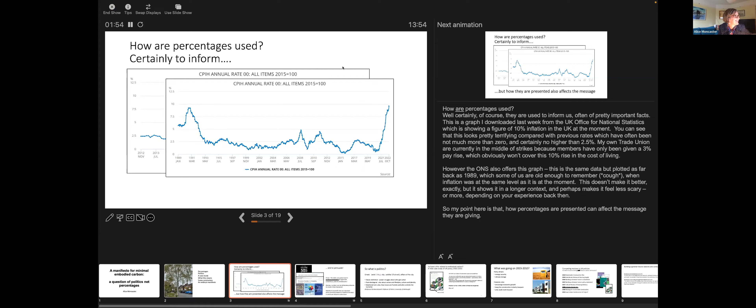Right, let me try, perhaps okay. I need to do a new share. So can you see exactly the same now? If you go to full screen now. We still see your notes. And I'm not sure how we could... I think, Alice, sorry for interrupting, if you have 2 screens, I think you need to share the other screen with us. Okay, so if I stop share, if I share desktop 1, can you now just see my slides?

Yes, that works great, thank you for the suggestion. Thank you, that's yes, I do apologize. We're not allowed to use Zoom at the Open University in the UK for some reason, so I'm a bit of a novice on using it.

Okay, so percentages, so we had got to this second chart from the UK Office for National Statistics, which shows inflation going back to 1989. I'm putting this up to say, obviously it's the same data, but it gives you a different impression. If you were around in 1989, 1990, it might make you feel quite scared because you might remember negative things that happened back then, or it might make you feel more confident because you'll think, well, we've been through this before and we can come out of it again. So percentages, how they are presented affects the message.

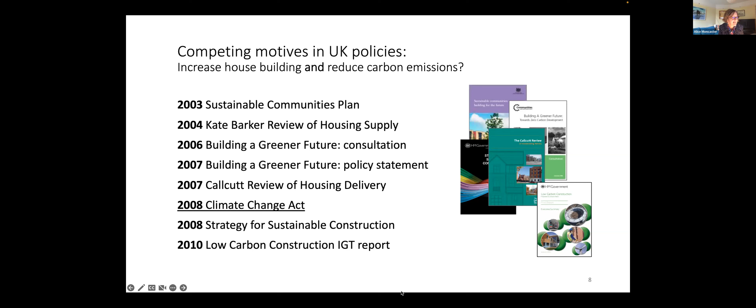After that, we started to see evidence of this political contest going on. So there was a consultation at the end of 2006 on building a greener future towards zero carbon development. So this was a policy also about building homes, but it was about building zero carbon homes.

And what the consultation was asking was, what is the definition of zero carbon? So it put forward its definition of zero carbon and asked for comments. And the industry comments were numerous, and a lot of them said it should include embodied energy. So these were people from industry, these were designers and contractors saying it should include embodied energy, embodied carbon.

And the report on this consultation brought these out in both the conclusion section and the section which showed the recurring and significant themes throughout the consultation. So this was being talked about and pushed really by industry back then.

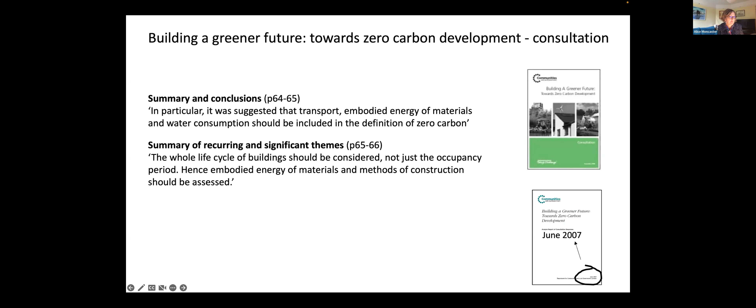However, a month after that consultation was published, the actual policy statement came out and completely dismissed it. It said, we don't believe a full consideration of embodied carbon is practical or realistic in the short to medium term. They changed it, putting it in a section about white goods, about services goods. And they said there isn't enough evidence and we don't know how to do it.

So the fact is, they dismissed it, but they did know the impact of construction materials. We'd had the BRE Green Guide specification giving us an idea of what they were for the last 10 years at this point, and the Bath Inventory of Carbon and Energy, which many people around the world have used since, was first published in 2006.

In fact, even the UK government had produced a previous report from a different government department saying that carbon emissions from the production and transport of construction materials were really important. They came up with these figures: 44% of all construction-related emissions and 72% of a building's life cycle carbon is embedded into the physical asset. So embodied impacts were seen as really significant by some parts of the government, and we see the use of percentages in particular being used to persuade of a political argument.

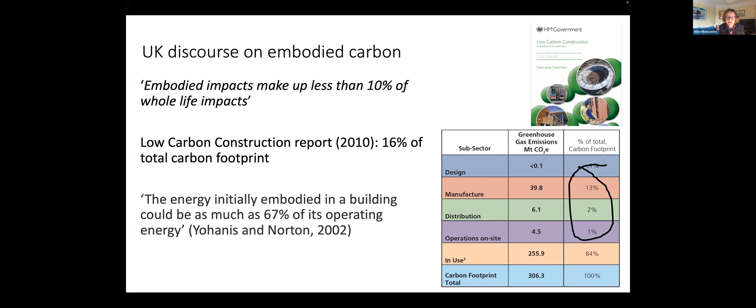And a paper from 2002, which looked at UK construction, Yohanis and Norton, said the energy initially embodied in a building could be as much as 67% of its operational energy, although they only used a 25-year lifetime, which I thought was really interesting. So that shows too how figures on both sides of that percentage equation can be chosen to demonstrate what you want to demonstrate. I think they wanted to demonstrate that embodied carbon was important and a big figure.

The definition of zero carbon had been set by the DCLG, the government department who'd won control over the narrative and decided how zero carbon would be framed. This was their final report.

The Callcutt review came out in November 2007. John Callcutt was a house builder, basically. He said, our review shows clearly that the house building industry does have the potential to deliver, it's now gone up to 240,000 new homes a year by 2016, and to achieve the zero carbon target. So if you make zero carbon only include operational carbon, then it's quite possible to build and to achieve zero carbon.

And the strategy for sustainable construction in 2008 only mentioned embodied carbon once, and it said it's generally far less than energy consumed during the lifetime of the building or the infrastructure project. It also said, nevertheless, is already addressed - basically, someone else is doing something about it. So arguments were being made that embodied carbon is minimal, that it's already been addressed elsewhere, and it's too complicated to calculate anyway. So this is real dismissal.

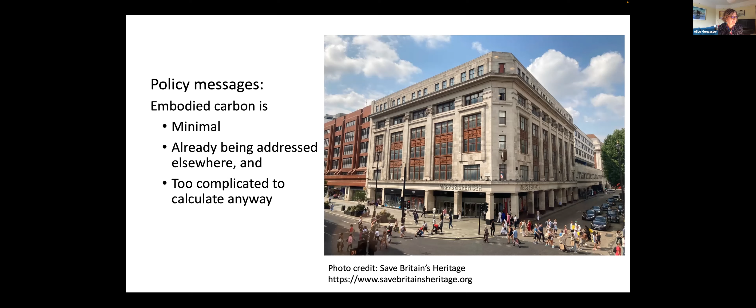And this fed into our report for the International Energy Agency, EBC Annex 72. And also more recently, we've looked at this in a new paper, Embodied Carbon of Concrete in Buildings, in Buildings and Cities.

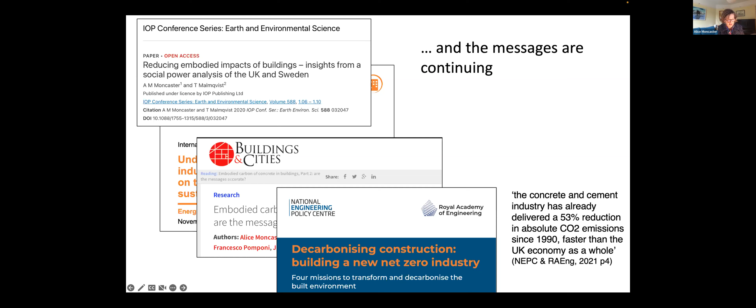So embodied impacts were excluded from the metric of zero carbon, even though it had been discussed and calculated within both academia and industry for many years. In particular, the evidence of dissenting voices, those reports from DEFRA and the industry consultation on building a greener future, are indications that this was a political struggle. This was a definite political move to keep it out.

And as Theodore Porter also noticed, professional industry experts were being used throughout to evoke public trust. And throughout, there were those industry experts leading the government reports.

So I wanted to look briefly at political theory, which says that industry networks and lobbies act along this continuum. At one end, there are the special interest groups who are self-organised individuals from that industry. They fight for their own collective concerns, and they have high autonomy, but relatively low political power. At the other end are what are known as policy networks, whose membership, topics, and even the very setting up, is defined by government. They have low autonomy because really the government is controlling what they're talking about and even what they're deciding.

But their prestige gives them power within industry. So they've almost swapped, in this case, their right to autonomy for being part of this more elite policy community. At this extreme, power is retained by government acting through the perceived expert influence of the industry groups. And of course, they also choose industry members who really actually agree with what they're looking at, so they choose house builders to demonstrate that they need to build more houses, for example.

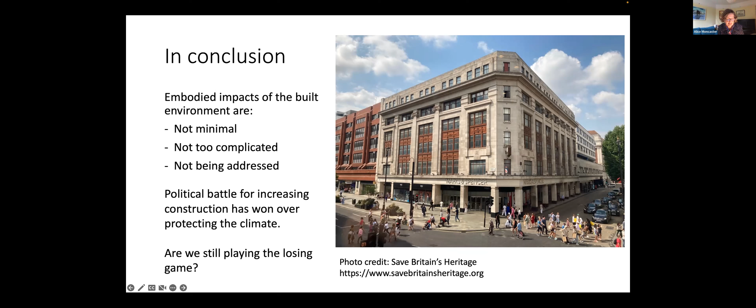So my embryo manifesto is: first, we should accept responsibility for the size of embodied impacts, and we should accept that these are happening now, not in the future, and they need to be decreased radically now, not in the future. We need to ask first, do we need to build anything at all, or is there an alternative? And next, do we need to build like we are doing, or is there an alternative? And finally, to always remember to question the numbers and percentages that we are being given and ask cui bono, which is who gains. Thank you very much.

I think I had a thank you for listening.

And I'm going to make you co-host, so I hope you can hear me now. We can hear you well. Cool, great, now let me try to share my screen. Whoops. Share, maybe like this could work. Yes, it works very well. And I'm going to pin you as well. Just remove that, okay. Okay then, thank you very much for the invitation, thank you Raman and Alice for organizing such a great event.

And I will present our work on how we see a climate neutral and circular built environment. It's mainly, I would say, a Swiss or European perspective on climate neutral and circular buildings.

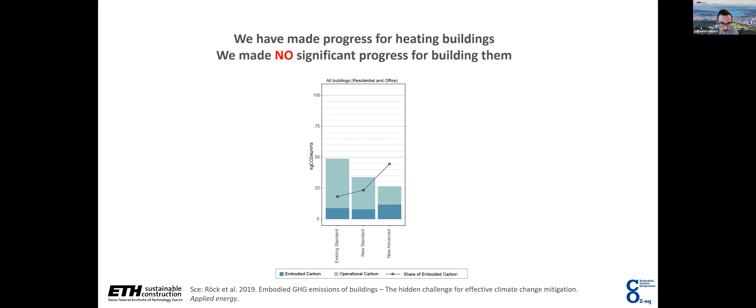I think everyone here knows why we need to focus on embodied carbon. We've made quite a bit of progress on how we operate buildings, but if you look at the average embodied emissions, it's always more or less stayed the same. We know we have to reduce emissions drastically, so there's not much time to lose.

And maybe just to come back to some of this, I think it's in line with what Alice was saying: we knew this already, but we've lost a lot of time muddying the waters, or something like that.

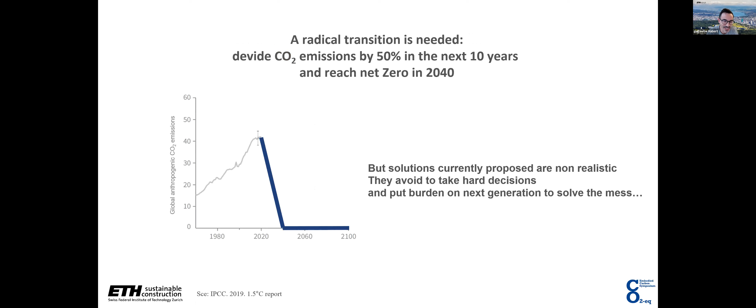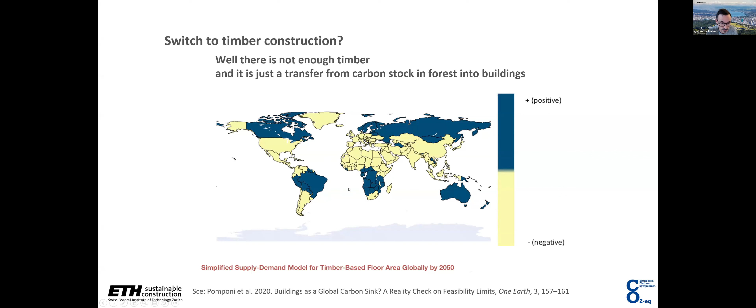The other way of doing it is to say, well, we can keep business as usual, we do concrete, except we do carbon capture and storage, so we continue to produce cement but without CO2 emissions.

That's magic. This is a study from the Carbon Capture and Storage Institute, from 2021, which I was surprised to see. It clearly shows that to get from 2020 to 2050, we just have to multiply the storage capacity by 140, which is quite surprising, because the same report shows that carbon storage capacity has actually been reduced by 30% in the last 10 years.

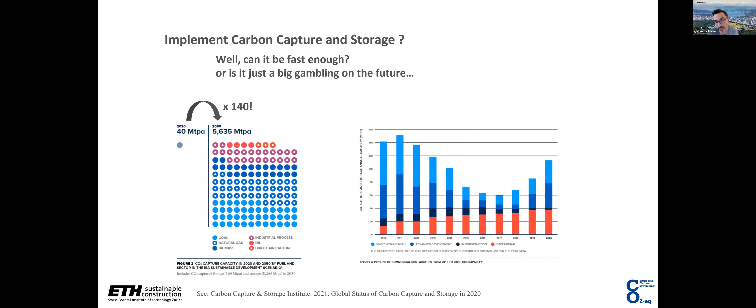So it means in the last 10 years you have reduced the capacity by 30%, and we think that we can increase it in the next 30 years by 14,000%. Well, I mean, the pace doesn't work, but the problem is, if it doesn't work, then we will end up at a moment where we have emitted too much CO2.

The way to do it is maybe first to simplify a little bit. You have three main flows. One is the human flows. That's the one, like 6 gigaton carbon per year, more or less, 6-9, something like this. And it's purely linear. That's why it's very small, but purely linear. That's why it creates climate change.

And then you have two huge circular flows, which are the biological carbon cycle, 120 gigaton carbon per year, and the geological carbon, so the equilibrium between the ocean and the atmosphere, which is 90 gigaton carbon per year.

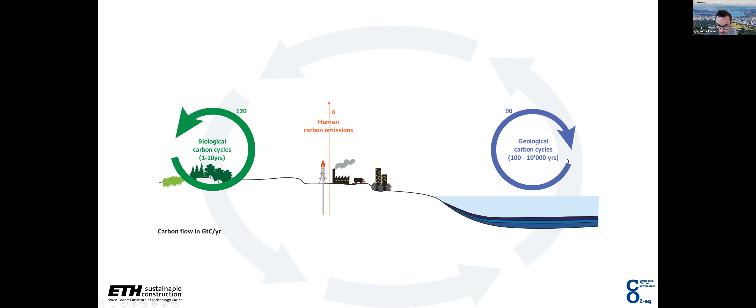They have a certain pace, these flows, because if you think spring, winter, you have a carbon molecule that is going in spring, stored in the leaves, and then falling, so being released in the atmosphere. And then on the other side, for the geological cycle, it takes much more time to go through the ocean, deep ocean, and then come back. So how do we play with that?

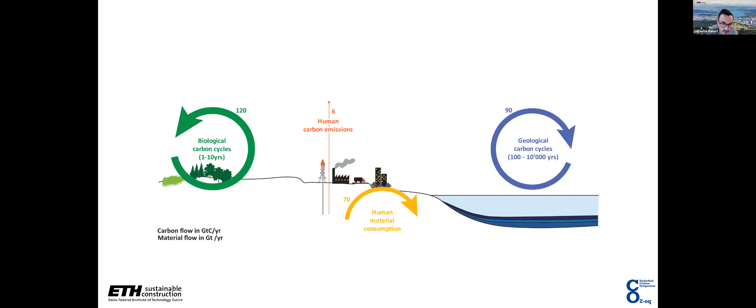The last linear flow that we have to think about is also the material. A linear flow of material of around 70 gigaton material per year that is extracted, and also landfills. And so first one is to say, okay, can we reduce these flows? This is, again, something that I think is extreme. I mean, that's more or less what I think what you said, Alice, is like, it's easy, it's known, and there are solutions.

This is a study we did, a review that we did 2 years ago, to show that if you look at the cement industry, and if you don't look just at the cement as an industry, as an industrial plant, but that you look at the cement as a complex value chain of various different actors, from the waste producers that can produce alternative fuel to the cement, to the concrete producers that can adapt the amount of sand, gravel, and cement in the concrete, to the architect or the engineer that can design the building, the demolition company that can either put everything in the dump site or actually sort the things or even deconstruct, and finally to the client that can act or not.

You have savings that are very easy to do, which means keeping the standards as existing, keeping the technology as existing, and you can save, if you see here, something like 60%, let's say 50%. So you have like 50% of CO2 emissions that can be saved just by doing well our job, meaning less clinker in the cement, less cement in concrete, less concrete in structure, less structure, and a certain reuse of the final waste. And that's it.

So you have already saved 50%, which is great with this mainly new type of cement, is that they will carbonate faster. So it means usually the cement, if you know a bit of the cement chemistry, you have limestone that you burn. So you have CO2, fossil CO2 that is released in the atmosphere, but within a certain geological time, the cement will go back to limestone, and so you will recarbonate your cement.

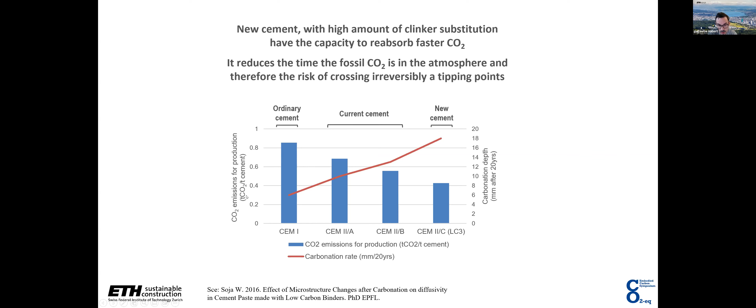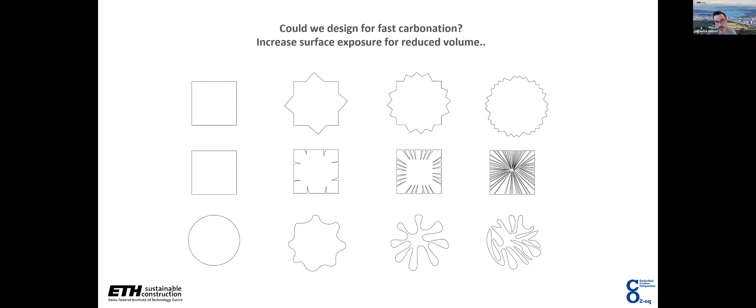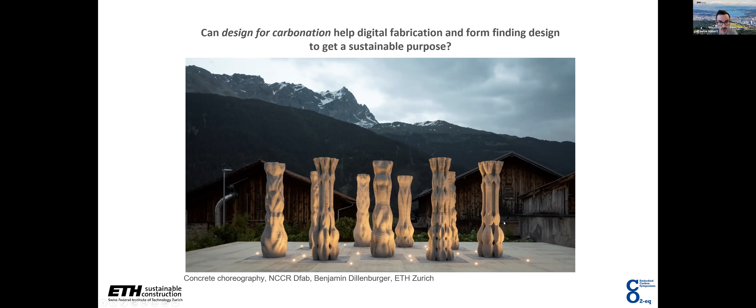Especially if you think about structures designed to carbonate as fast as possible—typically exposing as much surface as possible of the remaining volume. I think that could be an interest of 3D printing, where you expose as much concrete as possible to carbonate faster.

So on one side you're emitting less CO2 and recapturing it faster, and on the other side you can play with the biological cycle, like Luke was saying with hempcrete. Usually hemp or straw absorbs CO2 and releases it after 1 year, but you put it in the built environment and store it for 50 years. So you use the biological cycle as a pump to extract CO2, avoiding complex carbon capture and storage, and you can capture CO2 relatively fast, especially with fast-growing bio-based material.

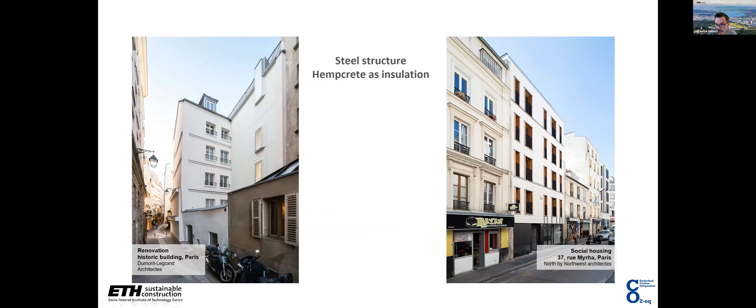For insulation, from a European perspective, straw and hemp are clear alternatives. Here are a few examples just to show it's not a crazy building—this is a very normal building in Paris, with hempcrete on the facade.

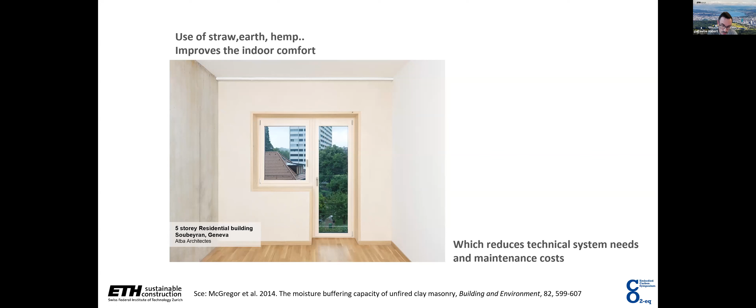To conclude on this logic, what I really think is that we should not think about one solution—like carbon capture and storage, or timber. Timber is part of the solution, but not the one solution that will save us all. It's really about putting the right material at the right place, and the right amount of material within a certain building. The way we could present it is to say we just need to change our material diet.

Same as it's obvious now for most of us that a vegetarian diet is better for your health and better for the environment—it doesn't mean you should not eat meat, but reducing the amount helps. Here it's a bit the same.

It's good to have glass and windows in your building, but this is a super carbon intensive material, so you need to use as little as possible. On the contrary, you optimize your low carbon materials like concrete, cross laminated timber, bamboo, etc. And you use as much as possible vegetable-based, carbon negative material like straw, hemp, solid wood, and others, plus carbon neutral materials like earth.

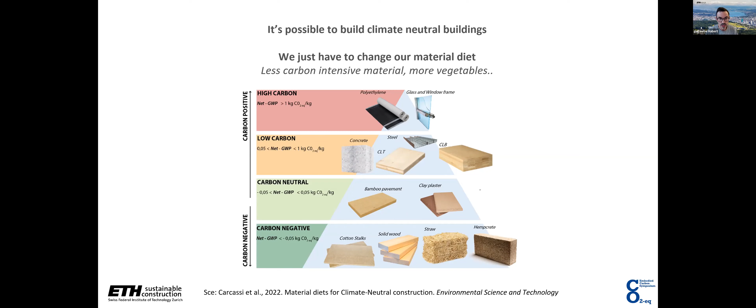Finally, before answering the question: do we have enough? This is a study we did recently, very basic, looking at how much bamboo and straw you have in the global south and north—straw in the global north for renovating the existing building stock, bamboo in the global south for new construction—and how much demand exists. We found that most of the time we have much more supply than demand, so we have enough materials.

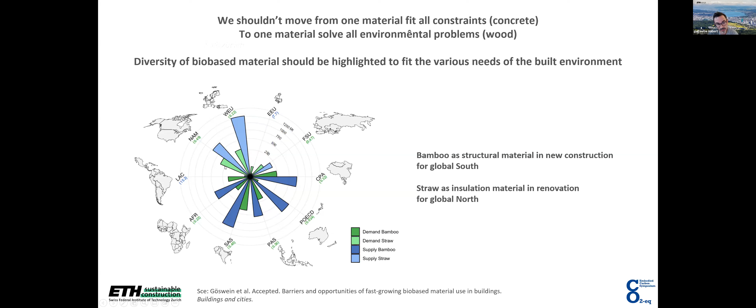To finalize, this was to say it is possible to be climate neutral. The last thing is, can you be circular?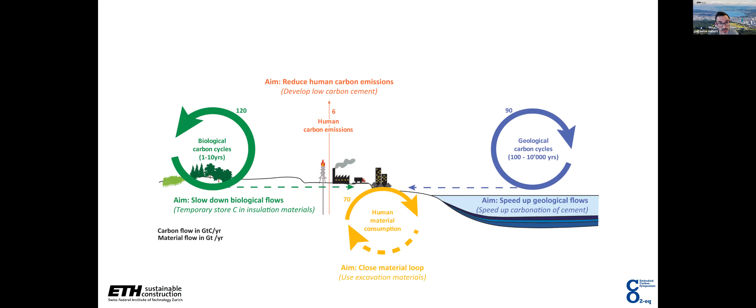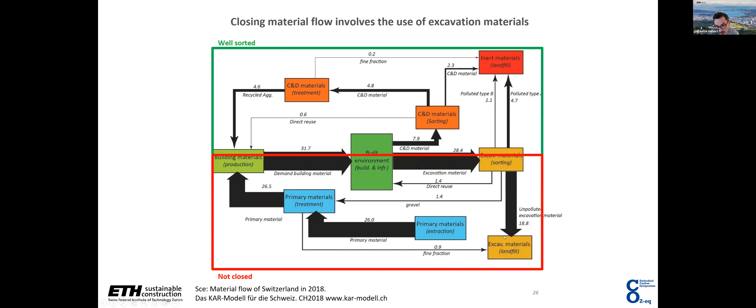The circularity question is complex, but to make it brief: if we just think circular in terms of amount of material, there's confusion, because the main material extracted from our cities isn't glass or windows, it's excavation materials. This is the material flow in Switzerland, where construction and demolition waste is mostly already circular with recycled concrete. What's absolutely not circularized is the excavation material that goes to landfill, and that material is actually earth. So if we want to circularize construction, we should think about how to use this excavation material.

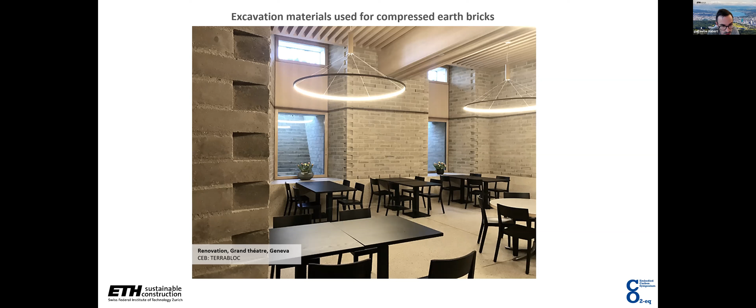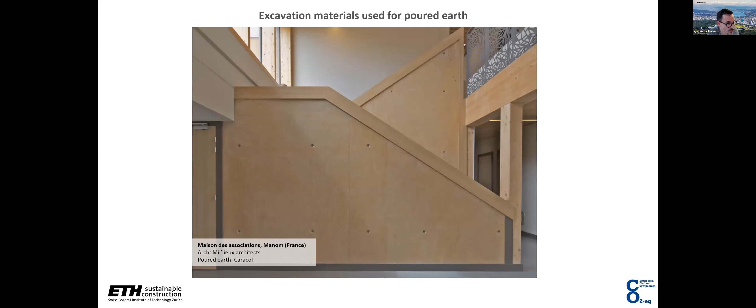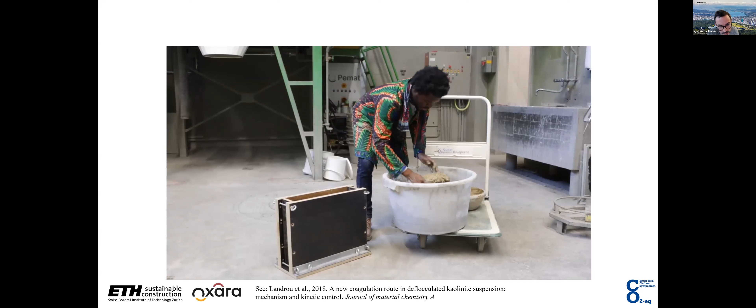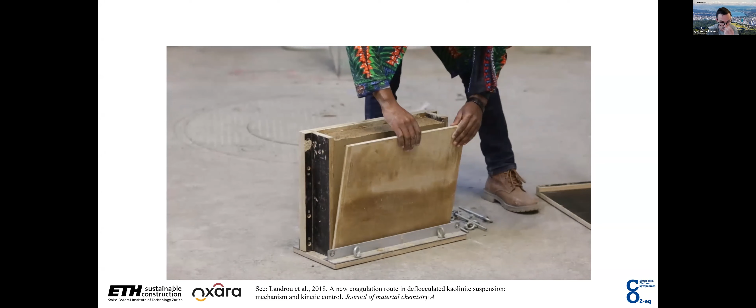If I have 2 minutes, let me show you the work we've done on this earth. Can we deflocculate the earth, the excavation material, so that we can make it like concrete - a poured material that we pour into a formwork, remove the formwork, and have a stiff material that works like normal concrete? This is now a startup called Oxara, promoting this cement-free concrete, because it looks like concrete but is just earth.

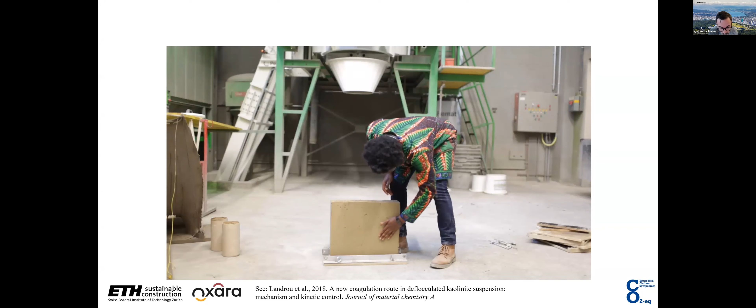So to conclude, I think it's typically possible to build these climate neutral and circular buildings with the technology and material we already have, without waiting for a magical solution like carbon capture and storage, which at best will arrive too late, and at worst won't arrive at all.

And the thing I didn't talk about, but I think Luc mentioned, is technical systems. It's a problem if we really want to go climate neutral - we also have to think about how to remove the technical systems. Basically, working with hygroscopic materials like earth, straw bale, or hemp allows us to regulate moisture much more, which reduces the need for technical systems, and so reduces the embodied emissions related to those systems.

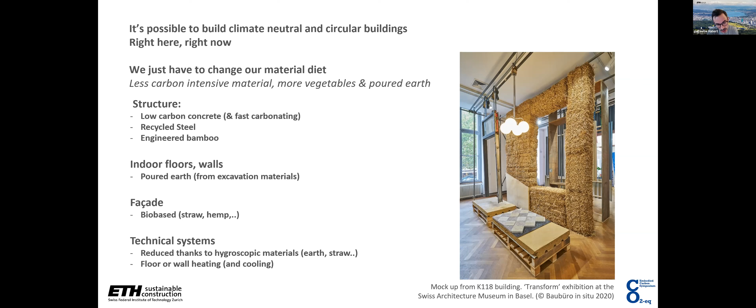And with that, I want to thank you very much for your attention.

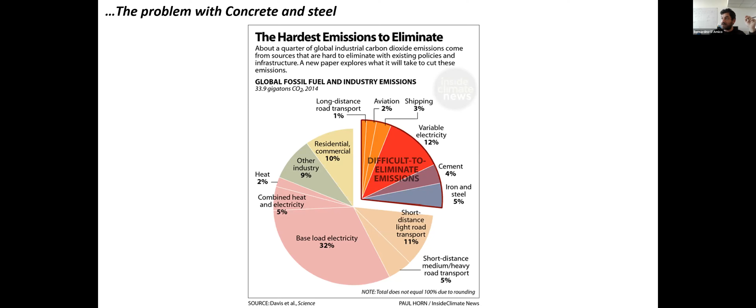What can we do about that? Of course, there is a lot that can be done. The first and main thing is going to be about using less of these materials, trying to use less stuff, if we want to achieve a decarbonized built environment by 2050. After that, we should get on a diet, to paraphrase Dr. Habert. We should use more bio-based material.

But at the end, there is still a problem. We cannot likely get to a net zero built environment unless relying eventually partially on carbon offsetting. So carbon offsetting will likely remain a necessary requirement in order to balance out these hard to decarbonize materials in the short to medium term. We know that the World Green Building Council, the RIBA, and many other institutions do contemplate the use of carbon offsets in order to achieve net zero in buildings.

The IStructE, the Institution of Structural Engineers in the UK, for instance, has released a guide recently explaining effectively how to offset greenhouse gas emissions, and effectively deeming them as a necessary requirement until and unless we can produce alternative materials, alternative products that can substitute entirely carbon intense materials like steel and concrete on all ranges of applications at scale.

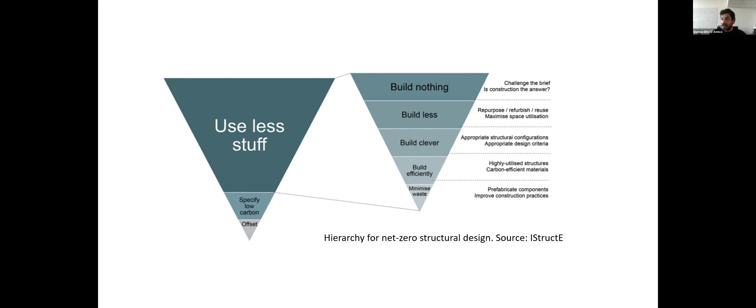There is clearly a trend suggesting that such instruments will play a major role in climate policies for decarbonizing the built environment. It's imperative we make sure that the adoption at scale of this mechanism will indeed correspond to a reduction in atmospheric greenhouse gas concentrations, so it's not just a tool for greenwashing and neutrality accounting only in theory, without an actual reduction in carbon emissions. To prevent the risk of carbon offset being used as a greenwashing mechanism, we first should quickly understand how a carbon offset works.

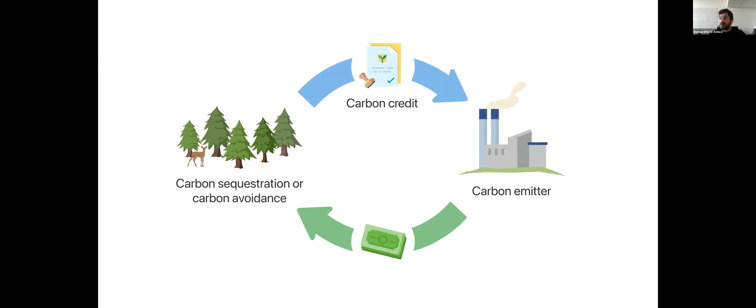From a physical point of view, it's a very simple mechanism. Essentially, the warming-induced effect caused by a certain amount of greenhouse gas emissions is independent from the geographic location where this emission takes place. So if we have an emission increase and an emission decrease of equivalent amount taking place in two different locations on the planet, we can conclude that their net climate warming effect can be assumed to be zero. A carbon emitting entity, let's say a building or a construction project, can compensate for its emission by reducing them by an equal amount somewhere else. By doing so, the project can claim to be net zero, meaning that no additional carbon was added to the atmosphere as a result of the construction project taking place.

However, the main risk linked to purchasing these offsets is making sure that there is a link of causality between the polluting activity purchasing the carbon credit and the offsetting activity selling the credit. This causality link is often called additionality. Namely, an offsetting project is additional if and only if the reduction in greenhouse gases would not have occurred had the offsetting project not been financed by the carbon credit scheme.

The problem is that verifying whether an emission reduction project is truly additional is effectively about proving that it wouldn't have existed without the polluting activity financing the offset in the first place. Proving additionality beyond any reasonable doubt is simply not possible, because that would require one to be able to travel back in time or jump into some sort of parallel universe where the offsetting scheme was never financed. It's effectively impossible, but in practice we rely on feasibility studies, so we effectively estimate rather than prove whether a carbon reduction project would have been able to go ahead without the offset financing scheme. In essence, verifying additionality is a tricky business.

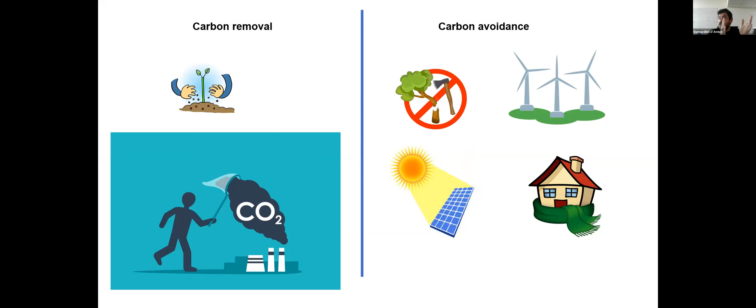We could argue that both types of offsets, removing as well as avoiding carbon emissions, have a positive impact on reducing greenhouse gas emissions, which is indeed true. However, what we want to highlight here is that there is a theoretical flaw when relying on carbon avoidance offsets as a part of a net zero strategy. This is effectively the main subject of this presentation.

So let's quickly compare two offsetting projects: a carbon removal project, which is about planting trees, on the left side of the table, and a carbon avoidance project, which is about preventing an existing forest from being logged. To figure out the net benefits of both offsetting schemes, the first thing we need to do is define a baseline scenario to measure against.

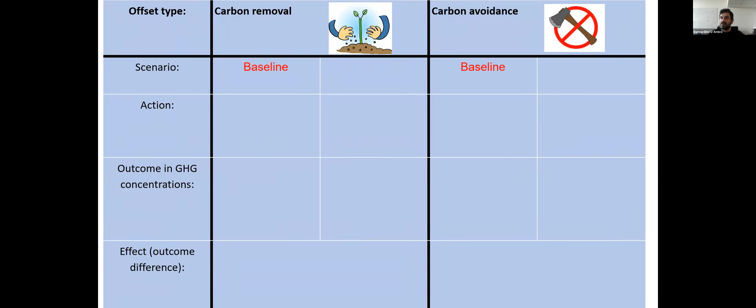And to do so, we assume—this is a very important detail—that although we cannot prove it, there is a very high likelihood that both offset schemes are indeed additional. Namely, no trees would have been planted and trees would definitely be logged had the two offsetting projects not been financed. As a result, no change in greenhouse gas atmospheric concentration would take place for the carbon removal baseline, whereas an increase in greenhouse gas concentration would occur in the carbon avoidance baseline scenario.

Similarly, trees are being planted and no tree is being logged, respectively, as the two offsetting projects go ahead. As a result, a reduction in greenhouse gas concentrations is expected from the carbon removal offset, whereas no change in greenhouse gas concentrations occurs thanks to the carbon avoidance offset going ahead.

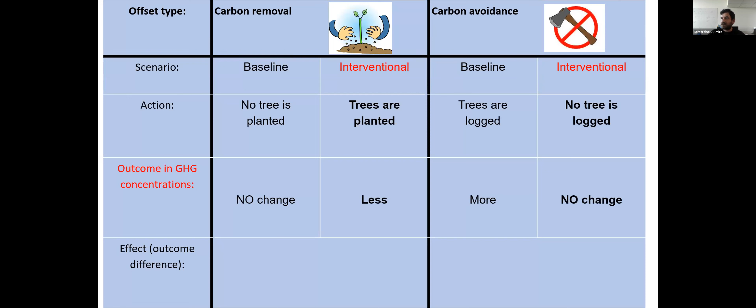So we can now measure the outcome for both offsetting schemes against their corresponding baselines, and we can see in both cases a net reduction in atmospheric greenhouse gas concentrations thanks to the offsetting projects. But at the same time, there is an upward shift of the baseline for the carbon avoidance offset. In other words, while the carbon removal offset is reducing GHG concentration from current levels to a lower one, the carbon avoidance offset is reducing greenhouse gas concentration from potentially higher levels down to current levels.

Therefore, it follows by simple logic that when a carbon avoidance project is used to balance out the emissions from a building or project or any other carbon emitting activity, the net effect of both the offset and the building project is indeed a net increase in atmospheric greenhouse gas concentrations. Whereas if a removal offset is used instead, the net increase in atmospheric greenhouse gas concentration is truly null.

Despite this obvious fact, carbon avoidance projects are indeed used to offset emissions linked to buildings, construction, and real estate portfolios, for instance. Therefore, these are enabling net zero claims to be made about these activities in spite of such simple logic.

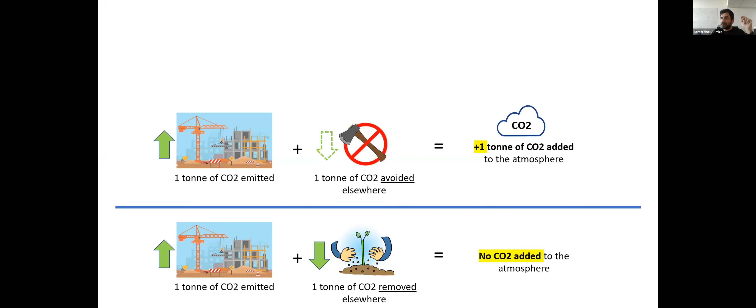And of course, one may argue: wait a moment, using carbon avoidance offsets is better than using no offsets at all. Of course, that's absolutely true, because if you are not using offsets at all, then you have a twofold increase in emissions. This is certainly true, this is certainly a valid point.

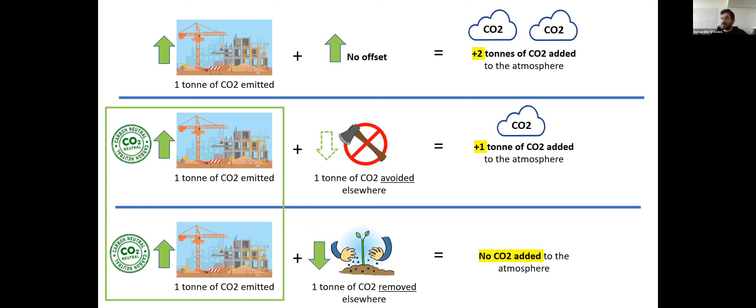We cannot dismiss that, but at the same time, we should also not dismiss the fundamental difference between avoidance and removal when doing carbon accounting. Because if we treat them equally, effectively we enable a net zero claim to be made while at the same time we are having an increase in greenhouse gas emissions. So we could end up with the paradoxical result of having a net zero built environment, where all new construction or refurbishment is entirely offset by carbon avoidance schemes, and at the same time greenhouse gas concentrations are increasing.

So to conclude, carbon offsetting schemes, and their trading markets, are now booming as instruments to tackle the climate crisis. These kinds of instruments are used for almost everything and anywhere—it's not just something restricted to the built environment. Recent figures show that almost 100 million tons of carbon offsets were purchased in 2020. Only 5% of these were aimed at financing removal projects. The bulk of it was mainly about avoided deforestation, renewable energy projects, and energy efficiency projects.

Now, you may be thinking that I'm suggesting we should stop pushing towards renewable energy and energy efficiency projects. That is certainly not what I'm trying to say. I do believe that preserving existing forests, decarbonizing our energy grids, and improving the energy efficiency of our buildings are all extremely important and necessary to fight the climate crisis. We must do more of this.

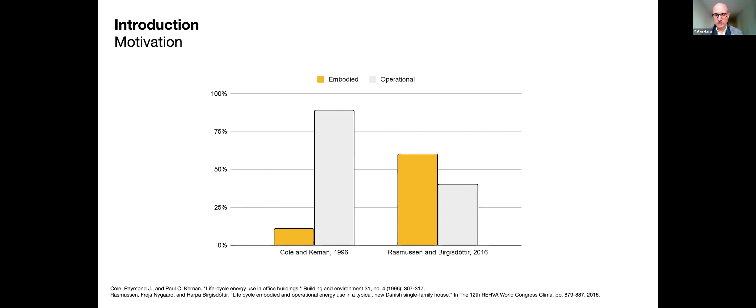You can see on the left-hand side a study from '96 that shows embodied energy as roughly 10% of the overall life cycle of a building, and on the right a study done 20 years later that shows a completely opposite situation. So the share of embodied energy, or embodied carbon by extension, as part of the life cycle of a building has increased over time.

And that increase can be attributed in part, or in most, to increased efficiency - either efficiency of mechanical systems, efficiency of lighting systems, efficiency of plug loads, but basically increased efficiency of machines.

So in order to achieve even deeper reduction of operational energy, passive means is something that designers and engineers have at their disposal, and that could be high performance insulation materials, that could be thermal mass, that could be other means.

So in order to discuss those passive means, let's look at the life cycle net zero carbon scenario. In that kind of scenario, the contribution of these passive means is more pronounced. So in a life cycle net zero carbon scenario, you would use on-site renewables in order to compensate for both the embodied carbon that you're consuming and also the operational carbon that you're consuming.

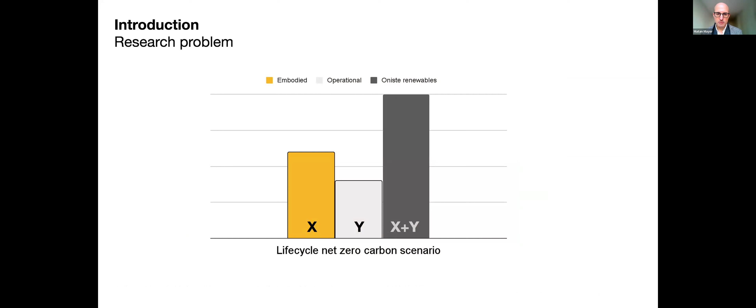So in this scenario, if we look at thermal mass, for example, thermal mass would help us to reduce that operational burden.

But depending on what kind of thermal mass we use, what kind of material we use for thermal mass, for thermal storage, that reduction in operational energy might result in a higher increase in embodied energy. So, for example, if we think of concrete as a kind of classic thermal mass material - concrete is very carbon intensive. So using concrete might help us reduce the operational carbon of the building, but would increase the embodied carbon significantly.

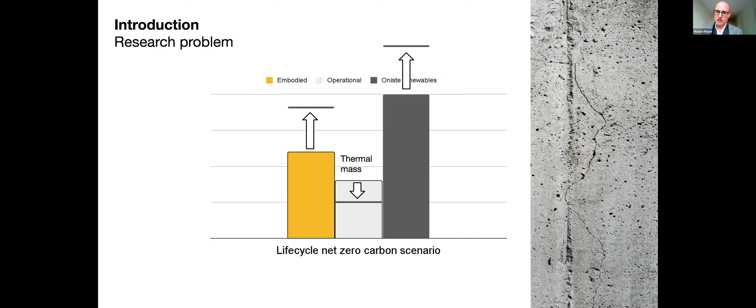And that will also obviously require us to use more on-site renewables in order to offset that carbon. And then we're going into almost like a feedback loop where we need more on-site renewables. In order to harvest more on-site renewables, we need more equipment like PV panels, etc., which adds more embodied energy to the tally. This is a kind of loop that is very difficult to get out of.

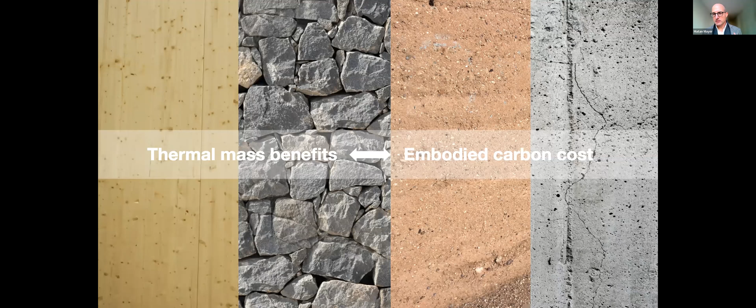So as you can see, there's a delicate balance here between the benefits that thermal mass can provide in terms of carbon reduction and the embodied carbon cost of thermal mass. And it depends very much on which materials you're using. So that kind of dilemma was what we were aiming for when we conducted this study and wrote the chapter.

So really the research question that we're looking at here is: what are the trade-offs between thermal mass performance and embodied carbon emissions?

So looking at prior work very briefly - one publication that we found very inspiring, and used as the foundation for our study, was this publication from 1980, the Passive Solar Design Handbook. The interesting thing about this publication is that it really ties this idea of heat storage to the amount of material used. So as you can see on the graph on the left, it surveys 5 different material groups and basically shows the thermal storage capacity of these materials depending on the thickness of the walls used. So that allows one to make a pretty direct correlation between thermal mass or heat storage capacity and carbon emissions, embodied carbon emissions.

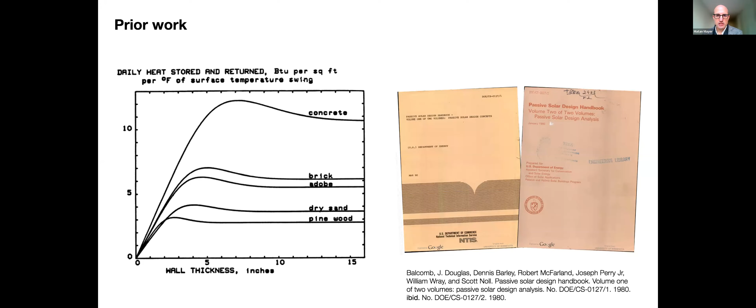So our method is really based on that kind of understanding, and the workflow we used here was to choose several material groups as a starting point. Then to look at the embodied carbon data for these materials out there - we looked at 3 different sources that are widely used. And then in parallel to that, also to calculate the thermal mass performance of those materials in a specific configuration. Those two sets of data in tandem allowed us to reach carbon emissions trade-offs for this range of materials in this specific situation.

After we calculate these trade-offs, we can start looking at the limitations of the system. We looked at limitations in terms of design, system, and data, and we'll discuss all of these in the next few minutes.

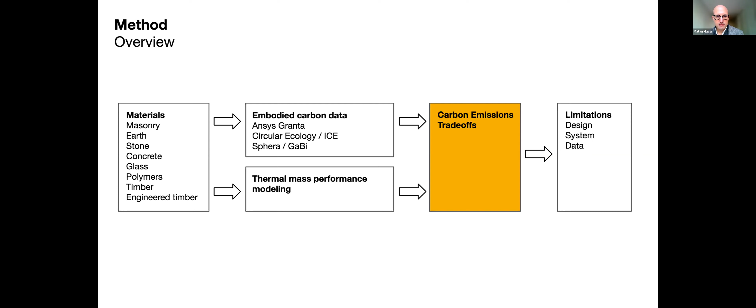Looking at carbon, we looked at 3 different sources of data here. The first was GaBi, and Tally by extension. The second was Circular Ecology, which is the ICE database based on the Bath inventory. And the third was ANSYS Granta.

On the right is a mapping of the data we found for 15 different material groups, basic material groups of construction materials. As you can see, there's a wide range of results for each one of these materials.

Here you can see that range for these 15 material groups. The highest range, the longest bars, are in natural materials, solid and engineered timber, for example. On the right-hand side, in more speculative materials like polymers or ceramics, there was a wide range of results in terms of carbon data for the same sets of materials.

This is a more detailed account of that variation, and you can see those horizontal black bold lines were the averages that we eventually used for our modeling in this study.

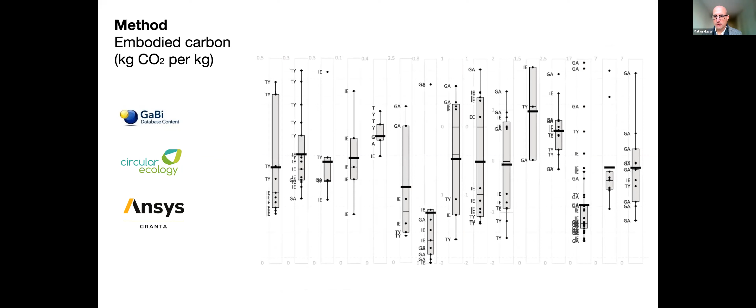Now Jonathan will keep talking about the thermal mass properties. Go ahead. Yep, thanks, Matan.

Similarly, we looked at what was available for performance in terms of the diffusivity of these materials. But of course, in this case we're limited to the ANSYS Granta database, because typical embodied carbon databases don't carry material performance data.

If we're looking at diffusivity, we're looking at a number with a kind of Goldilocks situation, where we want something that is conductive and dense, but not too conductive to become a thermal bridge, and not too slow to become an insulator.

If we zoom in a bit, what we start to see is what we'd expect: our concretes and natural stone materials and earth materials have the highest conductivities and densities. Therefore the diffusivity is high and in that optimal range.

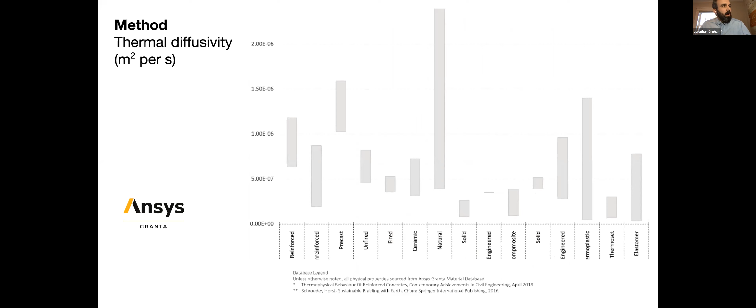But we do also see things like thermoplastics creeping into that optimal range as well. I'll note that natural materials start to have a really wide range of performance across the data set we're looking at.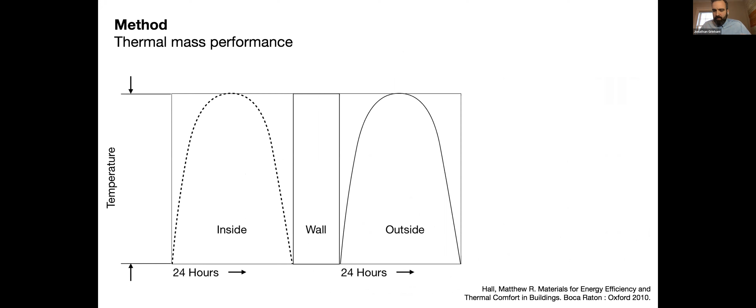As a quick overview, just to get us on the same page when thinking about thermal mass performance, we can look at this diagram and assume that if we had a thermally insufficient wall, the inside and outside temperatures could fundamentally be the same, as if we had a nearly transparent building. When we bring thermal mass into the situation, we're doing one of two things.

The energy it takes for the vibration of these molecules to warm up that material means we're storing some amount of energy in the selected material. The first thing that does is start to actually shave the peak temperature.

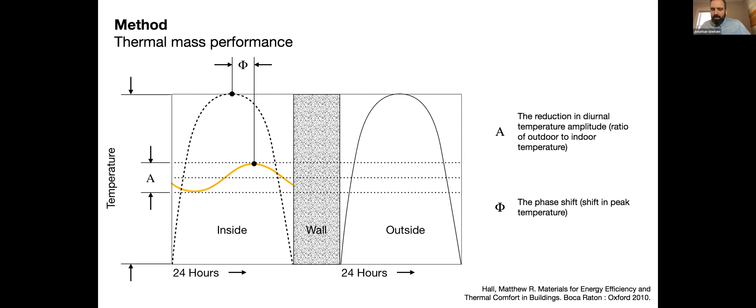So we have energy reductions in that space, and therefore we might have less thermal load to manage using some type of system. The other beneficial aspect of thermal mass is that we store that energy throughout the day and release it later, shifting when that peak energy actually hits the grid for cooling.

Going back to the model that Matan introduced, I won't get into all the details, but we use a lot of this model to show how the performance of these materials works, using a diurnal heat capacity model. Basically, over a 24-hour period, how much energy would be stored by 1 square meter of this material.

With variable depth, we can start to apply different functionalities, such as the absorption of the material, the amount of daylight fraction the material might have, whether it's solely connected through convection, and other design criteria, using this existing model.

Our addition to it, which I'll get into, is simply looking at how we start to convert that into carbon, and then comparing that back to the initial embodied carbon for that material. So if we take a closer look at the existing model, we can look at something like an isolated concrete wall in a space that's just linked to the rest of the building through convection.

We can see here the optimal range. The model also shows, if we look at the x-axis, this is the depth of the wall, and the amount of storage on the y-axis. We actually see some diminishing return—at some point you just have too massive of a wall. It can no longer store more energy than it's being affected over that 24-hour period, so we see a diminishing return at some point.

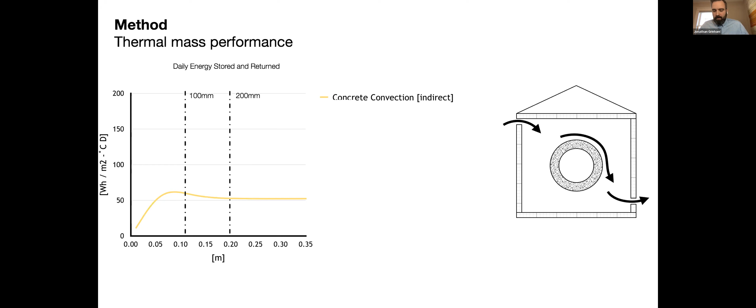The model can then be expanded to look at an interior partition where it's loaded from one side, with maybe direct radiant gain along with convection on the surface. The model can also be applied to a situation where we have a double loaded wall, either as an interior partition or exterior partition. We start to see this increase in the ability to store heat throughout the day, so this heat storage is over a period of 24 hours.

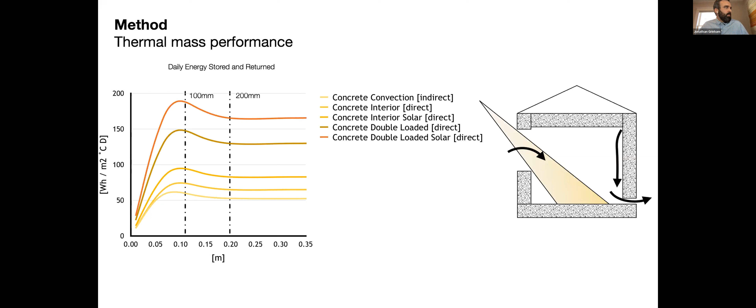Fundamentally what we're doing is asking how much heat can we store in a simple functional unit of 1 by 1 square meters of this material with a variable depth. We're not accounting for the rest of the building construction. Then we're counting how much embodied carbon goes into making that functional unit, and fundamentally how much operational carbon is avoided in terms of the systems that may have been in place and the source energy and carbon emissions to thermally control that building.

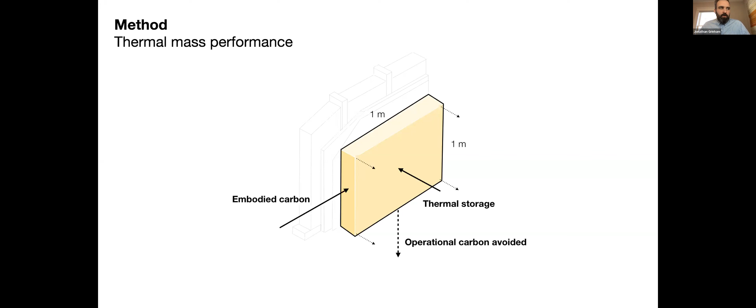So we take that curve from the previous model, and what we're adding to it is an understanding of how much kilograms per square meter are going into the operation in terms of an offset—in this case, the avoided aspect of using thermal mass.

We take this diurnal heat capacity from the model, and look at how many degree days we have an actual temperature change between the surface of the thermal mass and its environment throughout the year. We estimate the service life—using a long service life of about 60 years. Then we look at the carbon intensity of the grid, where that alternative energy might come from. In this case we use an extrapolated number for a linear decarbonization from the current US average to 2050. And then there's this optional aspect of what would the equivalent COP of an HVAC system be, which Matan will get into.

What we're able to do then is say, okay, how much embodied carbon based off the global warming potential of that particular material are we having per the depth of this material? So what is the total volume when we incorporate the depth of the material, and we overlay these over that same period of time.

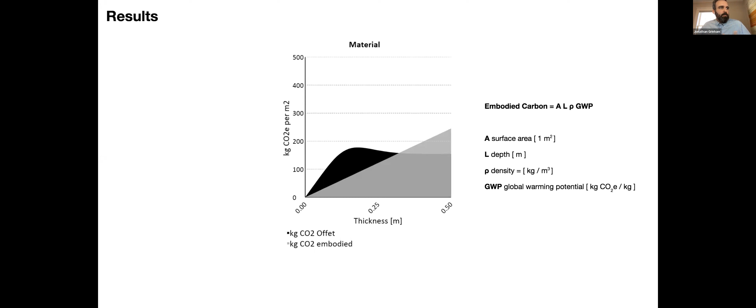What we start to see is that we have these three different conditions: in black, there's actually some type of carbon offset—avoided carbon that is not being emitted at the grid side, or the burning of fossil fuels at a boiler or similar. Then we have other areas where we have a net zero, where it all balances out. And then we also have an area where the mass could actually be too thermally massive—we're putting too much mass into the building, and it's ineffective in its performance.

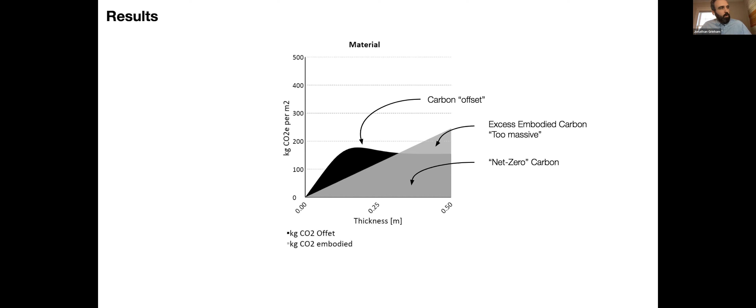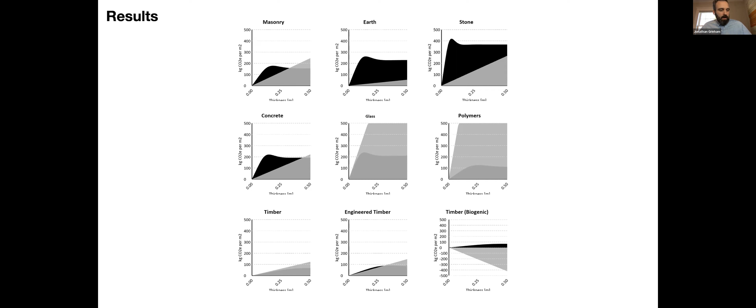So I'll hand it back to you. I think I might be able to control the slides now.

Yeah, great. It looks like I can, right? Okay, I know that we're short on time, so I'll do this section very briefly.

So in this discussion, we wanted to talk a little bit about the limitations of that method and the model that we developed. I'll talk about three different types of limitations: design limitations, system limitations, and data limitations.

So when we look at the design impact, now it doesn't seem to do it. Yeah. Okay, yeah, just go to the next slide, please. Sorry about that.

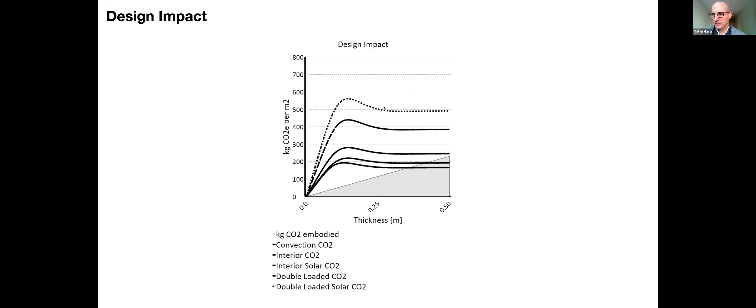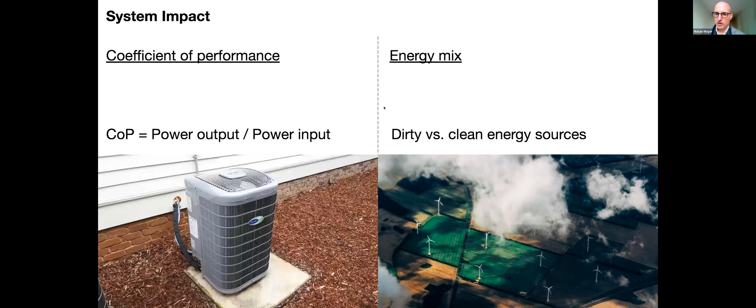Next slide, please. In terms of system impact, there are two notions that come into consideration here. One is the coefficient of performance, that is basically how efficient are the heat pumps or the mechanical system that you're using. The other one is the energy mix that you're using, whether it involves dirty energy sources or clean energy sources.

Next slide, please. So again, in the system impact, if we look at this kind of singular result that we reached, and then we add to that the influence of the grid, the dirty grid versus the clean grid, you can see that there's a wide range of possible solutions here.

And then if we add to that, can you go to the next slide? Yeah. So if we add the coefficients of the efficiency of the mechanical systems, you can see that adds even more, an even wider range of solutions. So again, this shows that there are uncertainties that really depend on the system we're looking at and the context we're operating in.

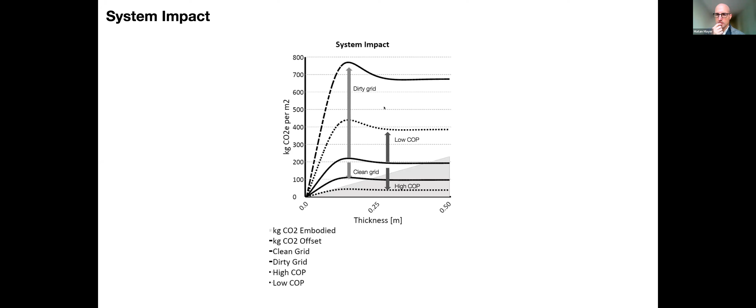And lastly, the data impact. As we mentioned before, there's a huge variety of data sources out there, and the data sources we looked at displayed a range of different results for both embodied carbon and for thermal diffusivity. So if you look at both of these variables in concert, again you get a variety of possible solutions, more uncertainties that play a role here.